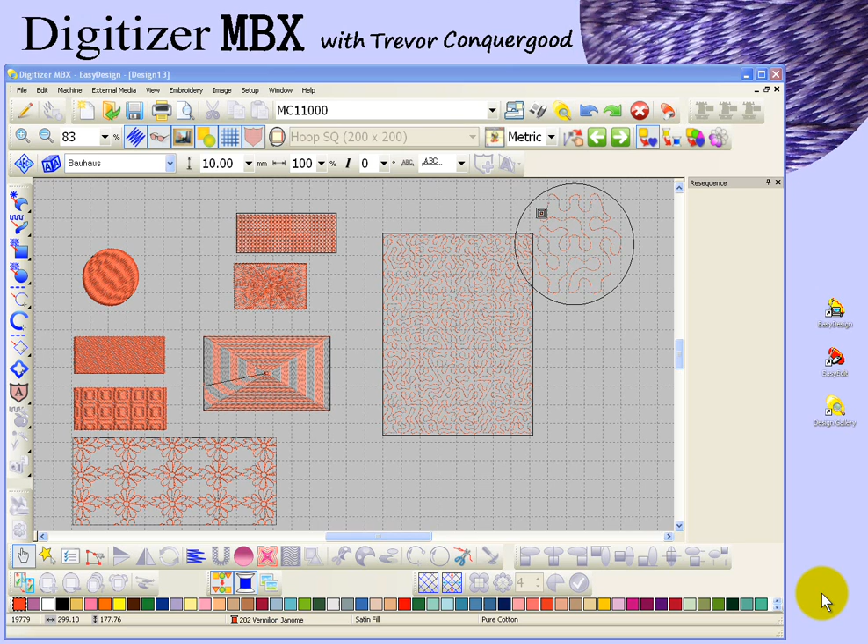In this segment, I'm going to take a look at the Select and Reshape tools, found at the bottom of your workspace on the editing toolbar. This is the Select tool, and this is the Reshape tool.

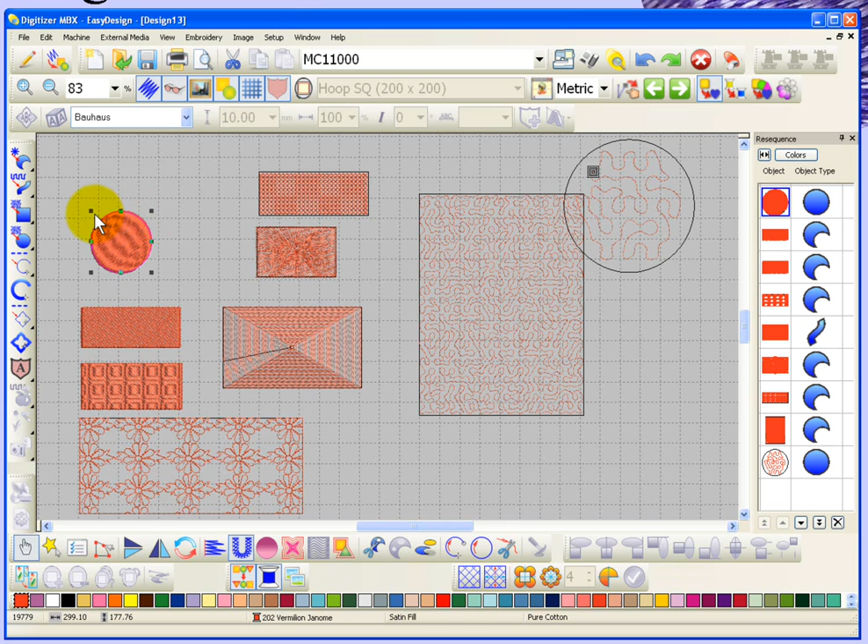We'll start with the Select tool. To use it, you can click on an object to select it, and I can tell it's selected because it gets handles around it. If I zoom in closely, a selected object also gets highlighted with a small pink outline, which may not show strongly with the red object I have.

One thing of particular interest is if you turn Visualizer off, you can very easily see what object is selected because it becomes highlighted in pink. For example, if I click on this rectangle, you can clearly see it's selected, or this circle is clearly selected. That's an important difference between Visualizer on, where everything looks more realistic, and Visualizer off, where you see more computer-generated lines for your stitches.

Other than clicking on an object to select it, you can also click and drag a box to select objects. Any objects inside the box you drag will become selected. So you can see I just selected 2 objects, and if I click and drag a bigger box, I can select more, forming a group of selected objects.

Whatever is not in your selection box does not become selected. For example, if I click and drag a box here covering these 3 rectangles, those 3 are selected, but this bottom one with the motif fill is not fully surrounded by my selection box, so when I let go, only the objects fully surrounded by the box become selected.

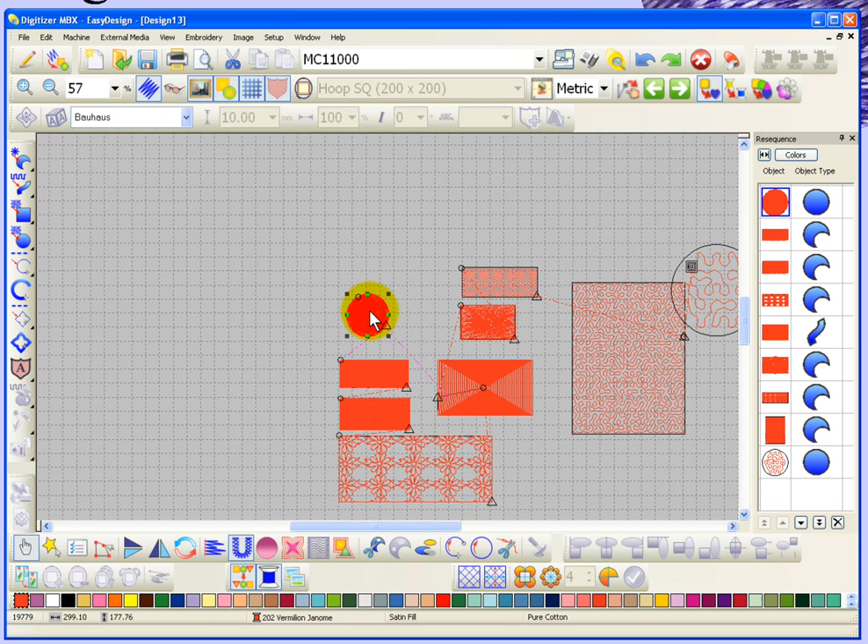You can also select by clicking one object and holding the Control key while clicking other objects to select them. You can see what objects are selected because they get a blue box around them in the Resequence window. You can also select objects by clicking on them in the Resequence window, and you'll notice those objects become highlighted in your workspace.

There are more ways to select objects, but those are the most basic ones, and we'll come back with more editing techniques later in the video. For now, those are the simple ways to select objects: click on an object, click and drag a box, or use the resequencing toolbar to select objects by clicking on them.

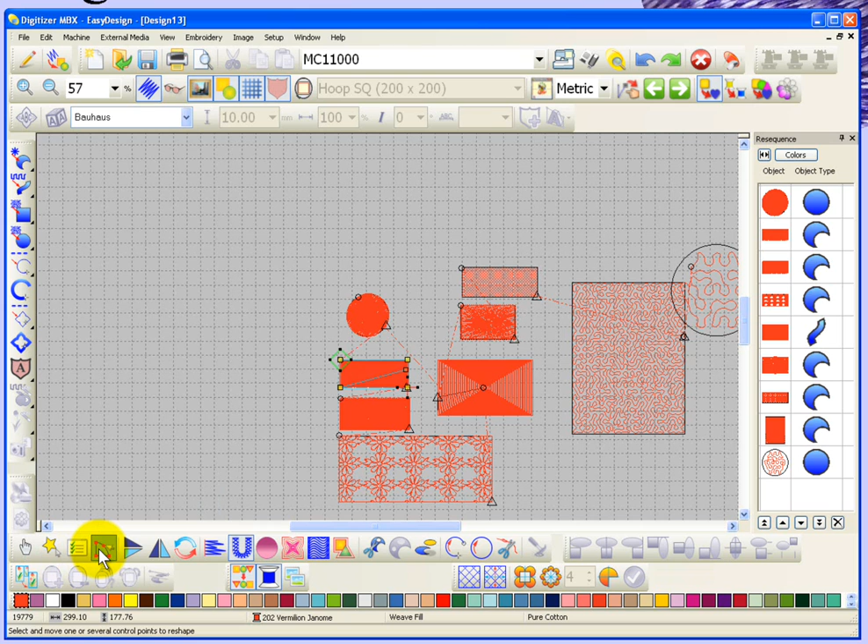Once you have an object selected—for example, I'll select this rectangle—if you choose the Reshape tool, several things become available. I'm going to take a close look at this rectangle. So we selected the rectangle, and I'll select it again so it's fully turned into the highlight color, and now I'll choose Reshape.

I get different options, and there are 3 very important things here. The most important is the stitch angle, which lets me change the angle of the background thread. I'll turn the Visualizer back on so you can easily see the thread, and how when I change that angle line, the thread changes to follow the exact line I chose. You can put that angle line anywhere you want, and that becomes the new stitch angle.

Also, when you're in Reshape mode, you have a small green diamond, which represents where this object will start sewing.

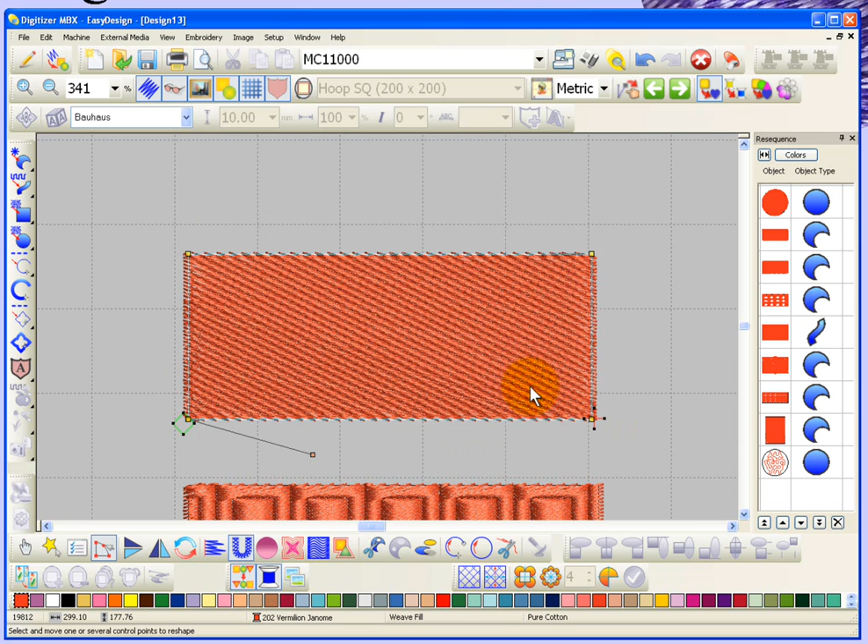The first stitch of the object can be placed wherever you want it to be, and this small red crosshair becomes the end point of this embroidery. So if I place this right here, then this fill will sew to this point, walk over to the other side, and sew back to finish at this point. If I place the little ending arrow over here, it will start at this area and stitch all the way across to the opposite corner.

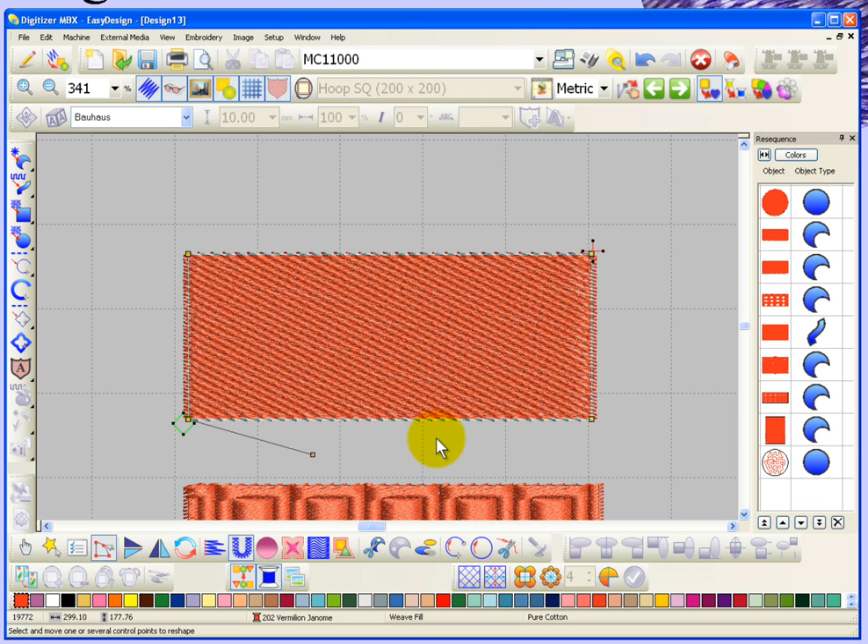So you can control where every object starts and finishes with the Reshape tool, and you also have access to the angle line. Now, one more thing I can do when I'm in reshape mode is actually change the shape of my object. This is a rectangle, so each corner has a node which could be selected and moved to create a new shape.

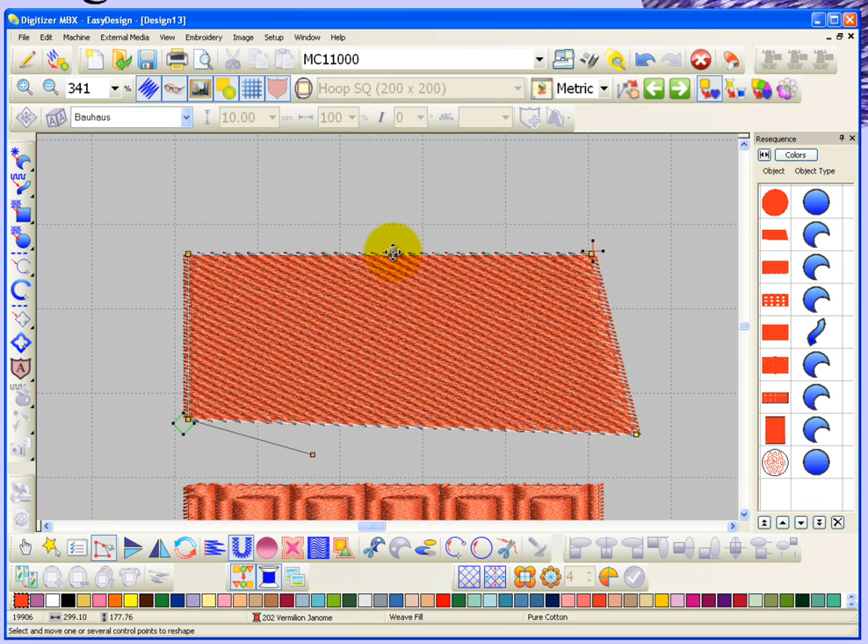I can actually add points. For example, if I click on the line of the outline of the rectangle, it adds a new point. And if I move that point now, you can see that I've added a point to the shape. If I left click, I get a corner point on the shape. If I right click over top of the shape, I get a rounded point. And you can see that there's quite a difference.

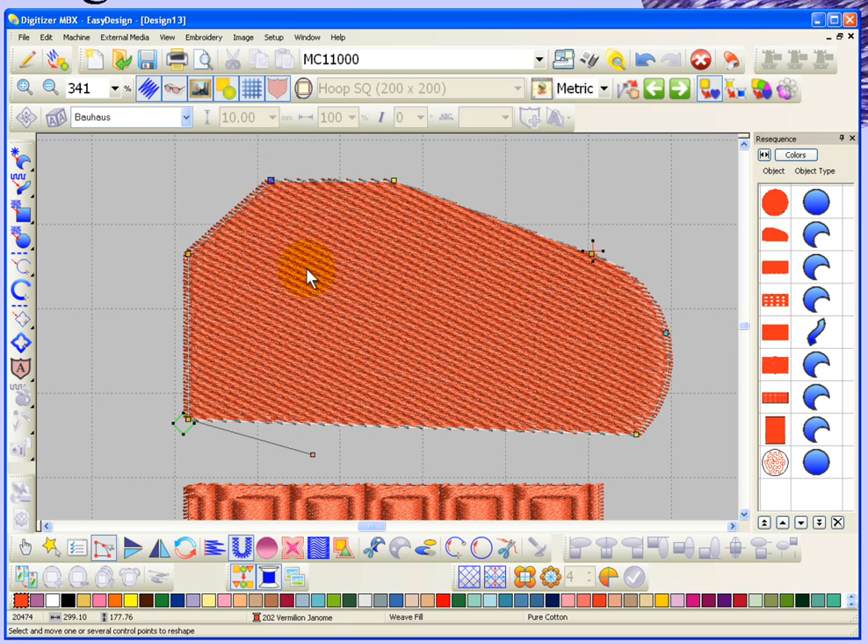Another thing you can do: if I touch one of those corner points, and then touch the space bar on my keyboard, it will change that point from a corner point to a rounded point. So you can change any of your points at any time from a corner to a round or back. That one is a curve point. If I hit the space bar, it becomes a corner point. Space bar again, curve point.

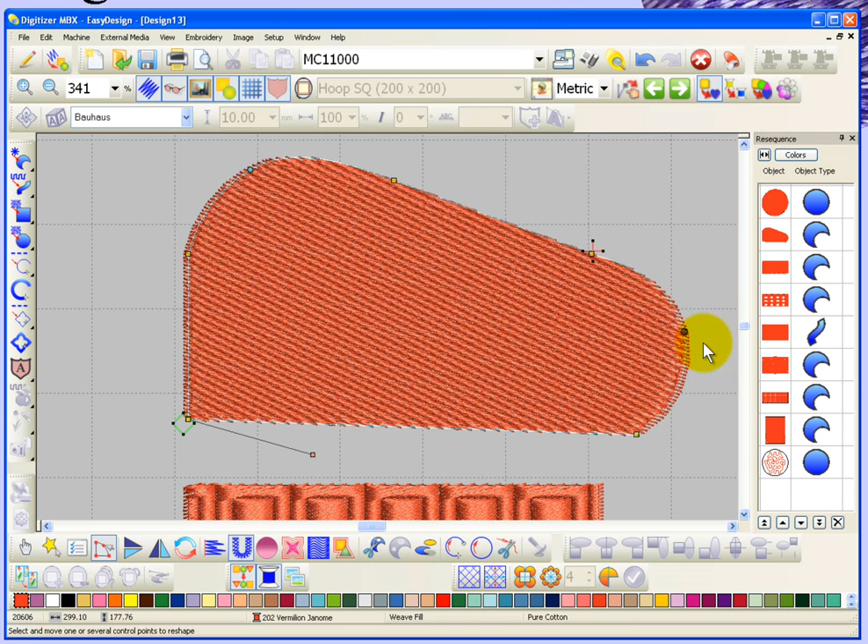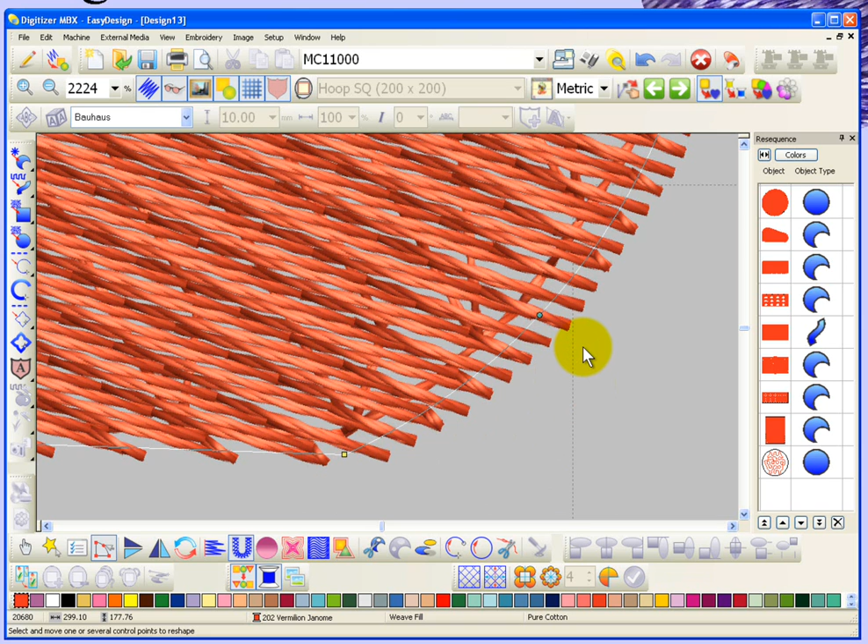Another thing worth noting, and maybe if I put these close together and zoom in, you'll see it better: corner points show up as squares, curve points show up as circles. So that's the biggest difference. And corner points are actually yellow, curve points look like kind of a bluey green. So that's one way you can tell the difference between those shape points.

And so that's the reshape tool. Now, when I click on any shape, so if I select this embossed fill rectangle, then choose the reshape tool, that's where I can again change the stitch angle, change the starting point, change the exit point, and add points to the shape by simply clicking on it. Or move the points that already exist to reshape that object to have any shape I want.

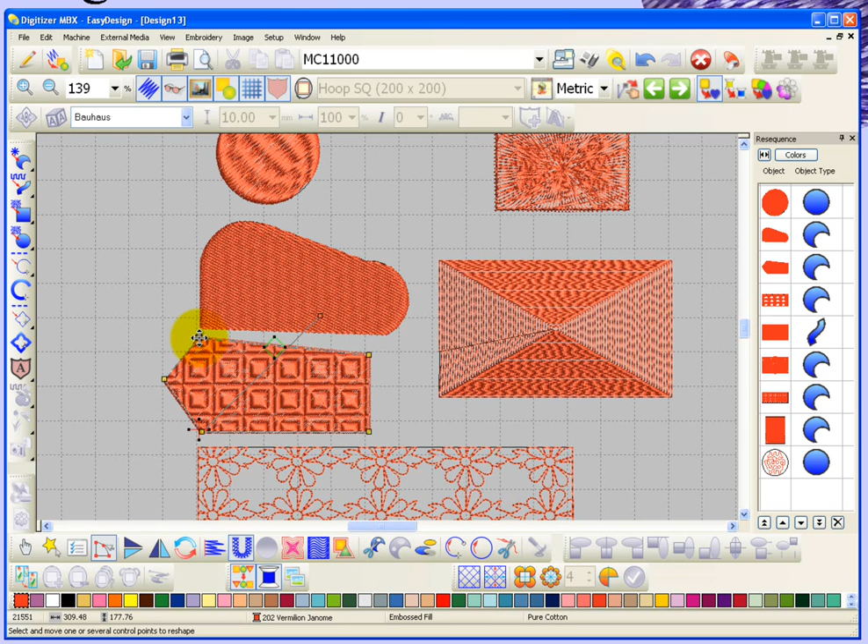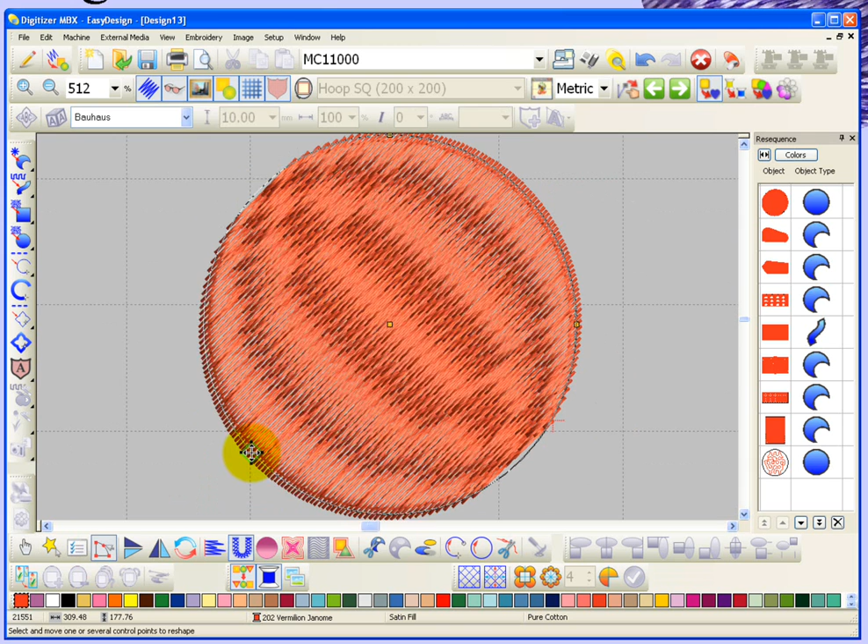Reshaping a circle is slightly different than reshaping a rectangle. Specifically with the circle tool, it's designed so that when you choose reshape, you can't move the exit point. It automatically goes to the opposite side of your start point, and the same thing with the stitch angle. So for example, if I move the starting point of my circle down here, it'll change the stitch angle to be directly across the shape from the start point, and the exit point will always be on the opposite side. That's a little bit different from any of the other tools. The circle tool specifically works that way.

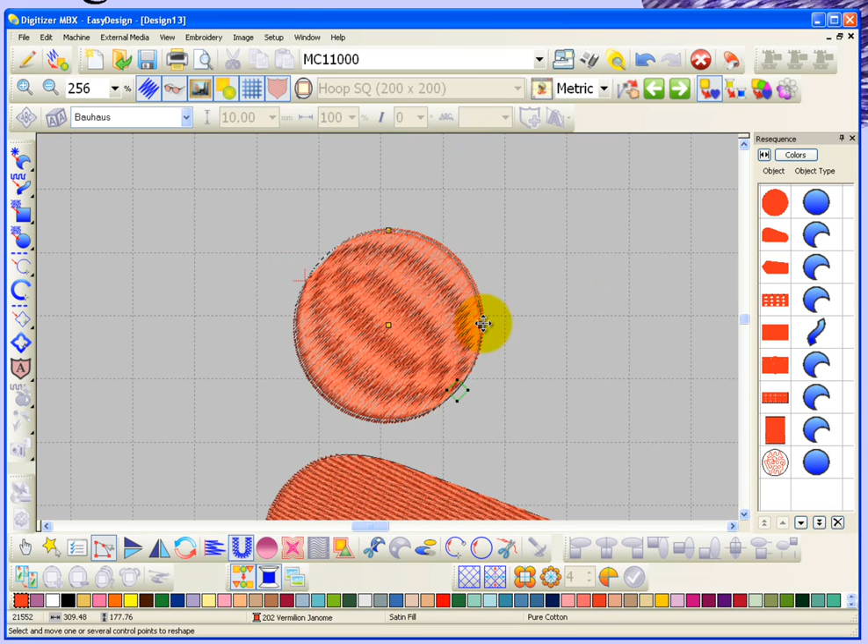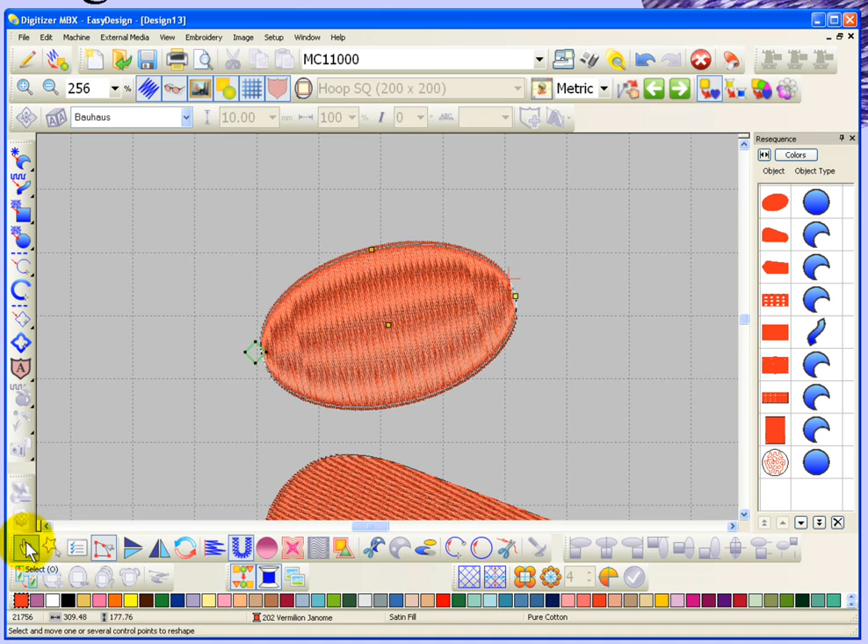Now, you can reshape it. There's only one shape node—well, I guess there's two shape nodes, one for the width and another for the height. So you can basically make any oval shape you want, and you can change the start point. Wherever it starts, the ending point will be on the opposite side, and the stitch angle will be directly across the center of that shape. So that's the circle tool, and it's slightly different than the rectangle tool, which gives you more control over the start point, ending point, and the different shape of the object.

So yeah, that's the select tool and the reshape tool, specifically with the circle and square object types.